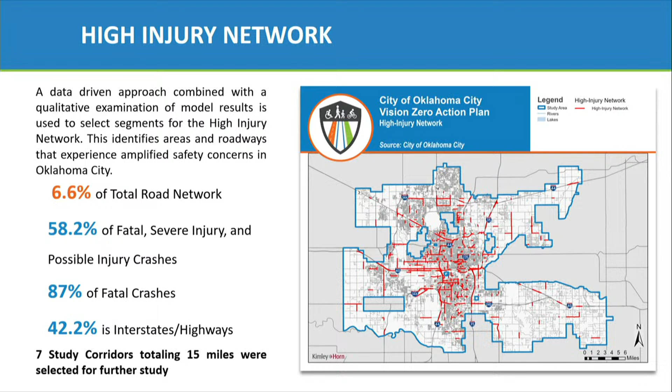We then used the high injury network and selected 7 priority corridors identified for further investigation by our engineering team, to look at and identify recommendations and possible solutions to improve safety along those specific corridors.

Part 3 is focused on designing the solution and getting to zero, which covers the more prescriptive measures of the plan. This includes identifying traffic safety countermeasures that, when implemented along certain roadways, can have a significant impact on reducing serious injury and fatal crashes.

Roundabouts are also a great alternative—lower speeds, fewer conflict points—along with other treatments for pedestrian traffic control devices, like pedestrian hybrid beacons.

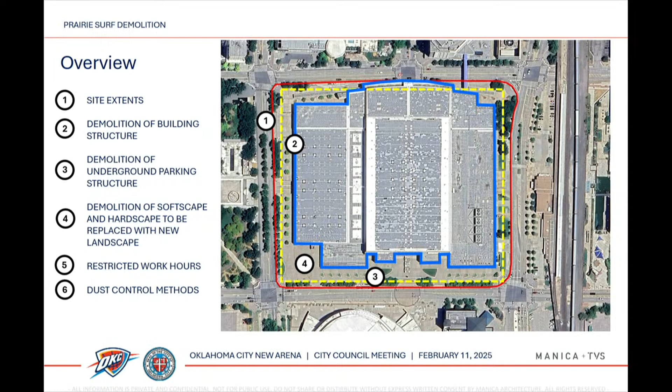Some notable aspects of the project—there is some complexity. We will work with the contractor to keep intact the 2 street car stops on the north and south. There is an underground pedestrian tunnel, item number 2, which will be capped off temporarily for demo construction and then reopened through new construction. There is also an overhead pedestrian bridge linking to the Wyndham, which will be demolished in its entirety, and the gap left in the hotel will be patched to match the existing facade.

Number 4 designates some trees that we are working to preserve. As you'll note, there are a lot of trees over the parking deck—those will obviously need to be removed, but we are trying to save some trees on the northeast corner. There are also some items to be salvaged; we'll work with the contractor to salvage the right-of-way items, and there are some additional architectural elements that will be saved as well.

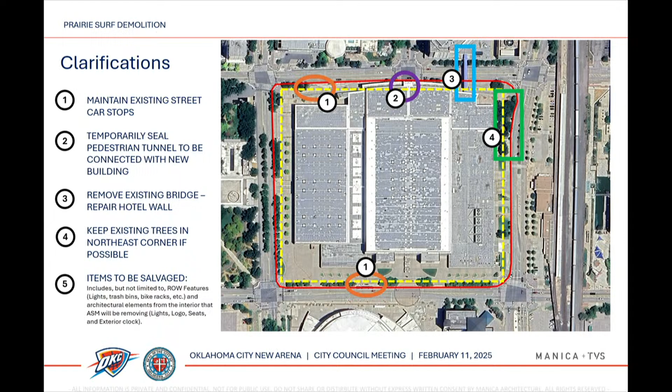Lastly, traffic. We will work with the contractor to minimize any traffic impacts. We have identified, in order to keep it organized, a single construction entrance to the west and a single construction exit to the east. That should minimize any impacts to the overall traffic.

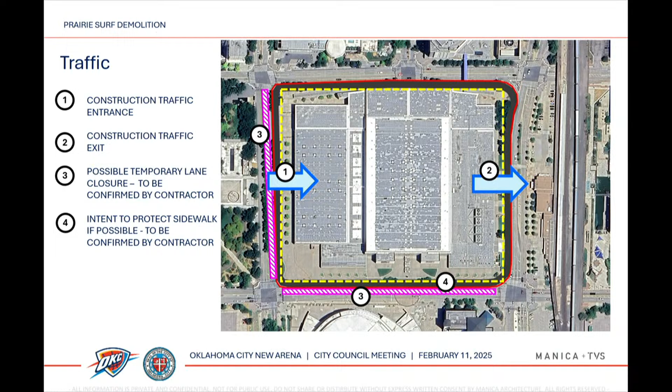As noted, the extent of the parking deck does get quite close to the right-of-way on the west and south ends, so there may or may not need to be some lane closures that are temporary. We again will work with the contractor to minimize that impact, but we don't believe there will be any substantial impacts to the overall traffic.

Schedule, just walk through this real quick. Pre-bid conference is scheduled for February 20th. The demolition bid opening will happen on March 5th. We will then give a recommendation to council on March 25th, and we will give the contractor notice to proceed on the 26th. The entire construction is intended to be 6 months long, so completion at September 30th. And that's the extent of my presentation.

I know there's a lot of traffic around 7 a.m. to 9 a.m. and 4 p.m. to 6 p.m. because I drive it every day. Any special precautions being taken during those time periods?

I was actually meant to mention that we will try to work with the contractor to minimize that disruption in terms of limiting the time duration of construction to limit both noise and dust. So we believe that will also minimize the traffic concerns there as well. And then I also meant to mention that we will try to preserve the right-of-way sidewalks on the perimeter, but again, we'll need to work with the contractor to see what's possible there.

Great, thank you. Does anyone have any questions about the demolition? If not, I'll entertain a motion to approve items A through F.

Thank you. Thank you.

We have a motion and a second. Please vote.

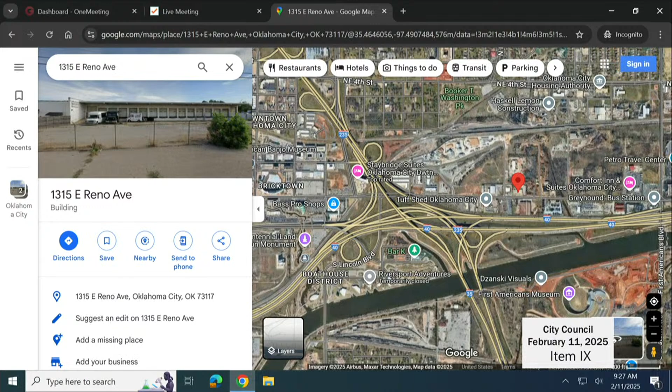So if you flew here from Fort Worth, Fayetteville, wherever, and your hotel is here, you have to rent a car to get over there. You should be able to walk safely to something that close. You should be able to take your dog. There's a place called Bark right there. You should be able to access that.

And so right now, people cannot access the Boathouse District by foot or by bike. They cannot access this corridor safely, and their lives are literally in danger, as you saw from the report in Vision Zero. So I just wanted to give that much bigger context.

I will also note a lot of this used to be middle-class black housing all north up there before we built I-235 right through historic black neighborhoods. I say that during Black History Month. We can do better than what we are doing right now. And I'd like to know, what is our plan for sidewalks or trails or street lights and trees to make this safe access from Bricktown to First Americans?

I'm proud of the things I just said about Bricktown and First Americans, but what are we doing to connect people to it by foot and bike, safely? That's certainly something we can look at and get back with you on. Not anything I have here today, but we can have conversations and provide information.

I think it's interesting to see how we look at that with the Bike Walk plan and what we have there. There's a lot of interesting questions about what we do with that corridor and how we address it.

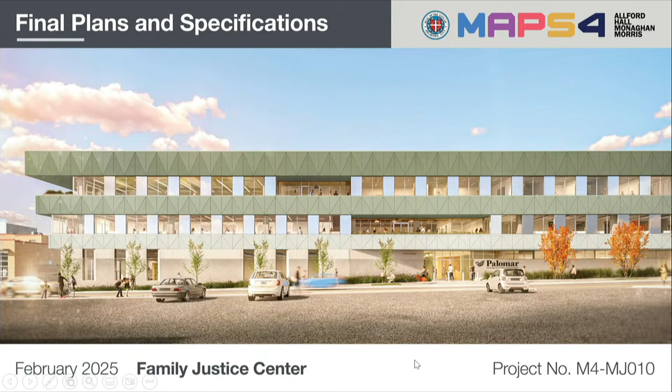Good morning. Thank you very much for having me today. I'm delighted to present to you the final plans and specifications for the Family Justice Center, otherwise known as Palomar. It's been a couple of years since I've been here to present, so we're delighted to finally make it.

This is Midtown. You can see the existing Palomar building there on the corner of Hudson and 11th Street. The proposed site for the new building is directly opposite where the dog park used to be, in that red box shown between 11th Street, Hudson, and Park Place to the south.

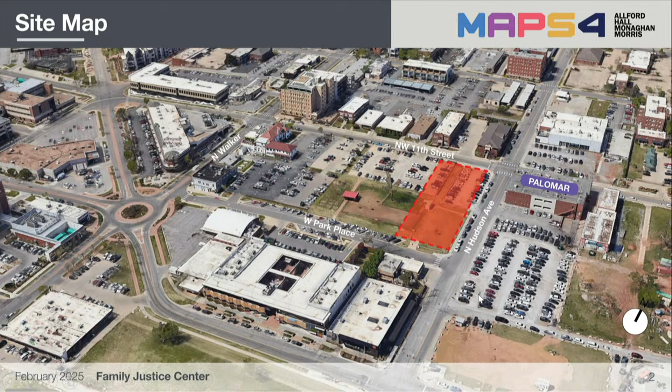On timeline, we're here today to present the final plans. Hopefully, if it goes well, we'll go straight out to bid. Bids will be received back in the beginning of March, and then hopefully we'll be back here again in mid-April to present the final figure for construction, and if approved, we'll move into construction, due to be completed on the 11th of February, 2027.

The building's a 3-story building, just under 72,000 square feet. The first floor is predominantly client spaces, medical services, a cafe space. On the second floor, there are partnering offices and Palomar offices. The third floor is mainly a large community room and therapy rooms.

And then the private spaces where clients spend a lot of their time are tucked away at the back of the building, very protected and concealed, and they all face out towards a courtyard space in the center. One of the things we wanted to do from day one was make sure that every single client space had access to natural light and access to nature, because that really does improve people's well-being and helps the recovery process.

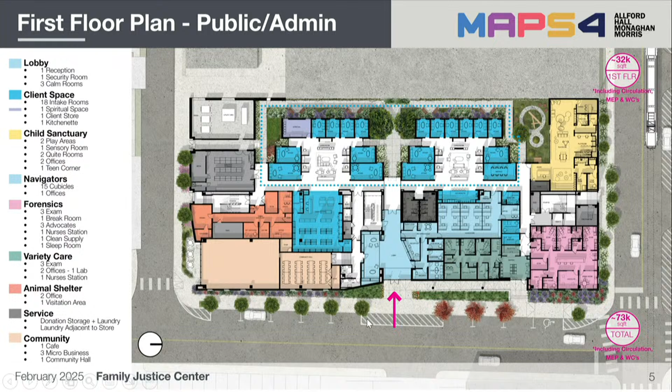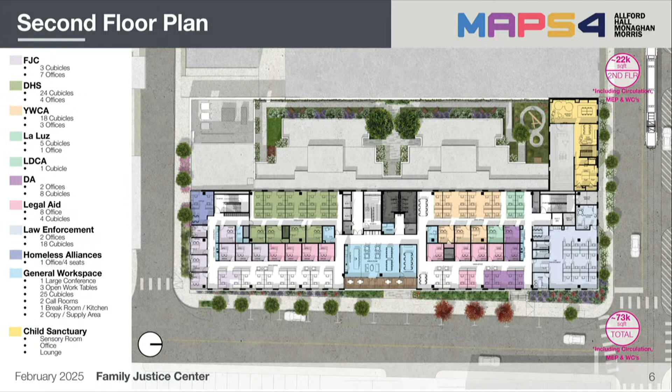Moving up to the second floor, this is, as I mentioned, the office space for all the partners and Palomar's own staff as well. I won't go through all the partners, but you can see them listed there on the left-hand side. The idea of this space is a mixture of open office space and cellular office space, but the idea is that there's a central hub in the middle there with a break room that's hoped to bring people together and help collaboration between those different services.

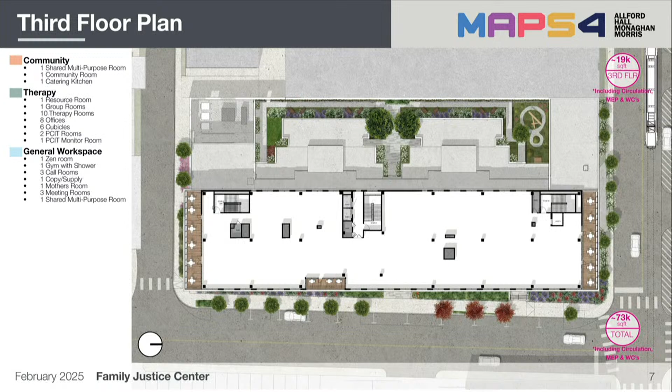Then moving up to the third floor, as you can see right now, this is proposed to be just built out as a white box. I'll come onto that in more detail, but due to budget constraints. This area will have a large community room and the therapy spaces and some general workspace as well.

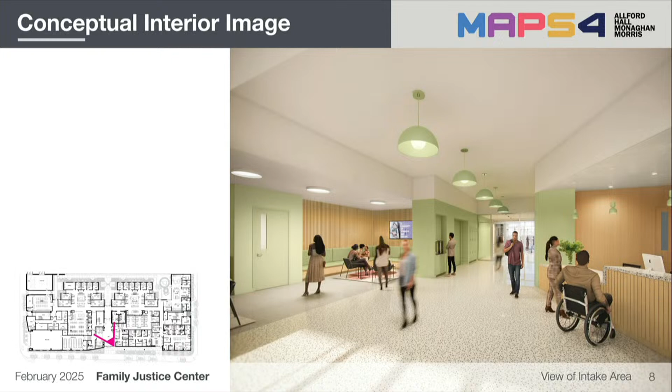And here's some images of what the building will look like. So this is the main lobby space as you come in off the street. The reception's there on your right with a waiting room on the left, and then the secure entry point in the distance there with the glass doors.

These are the living room areas, as I mentioned earlier, and around there, these main sort of hubs are the client intake rooms. The idea is that they are meant to feel like a living room, so they're very domestic in scale and don't feel institutional at all, and provide different spaces for people in different crises.

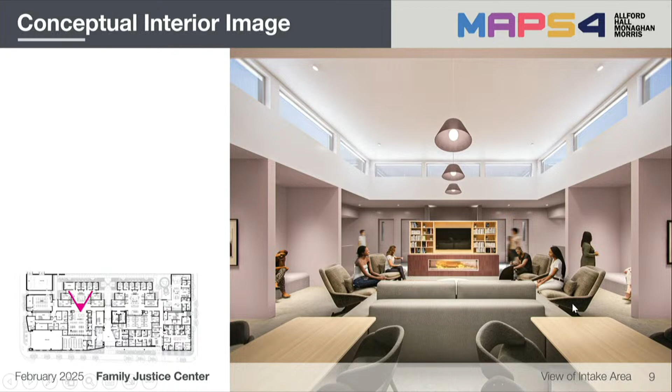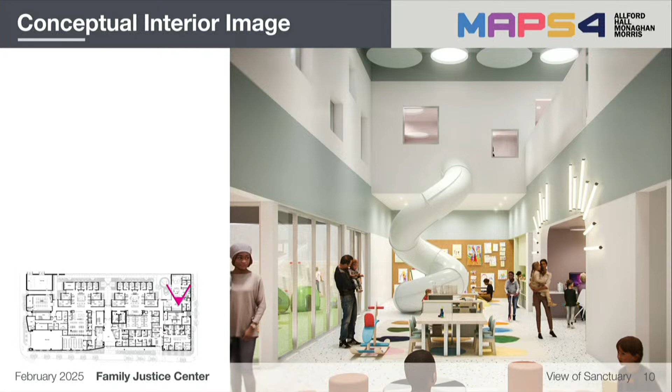This is the kids' play space, so this is a taller, brighter, double-height space, hopefully with a slide in the middle of it that also opens out to an outdoor play area.

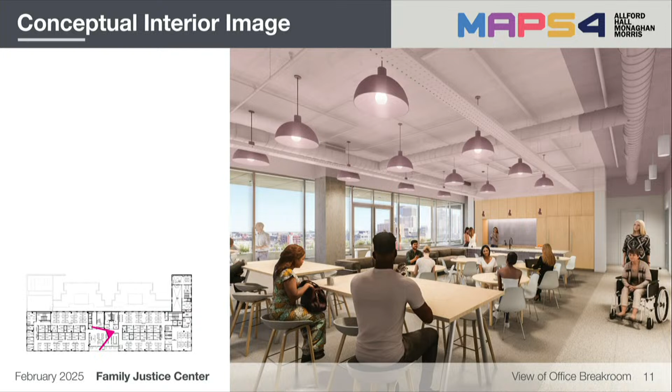This is moving up to the second floor, so this is the break area I was talking about earlier, a collaboration space with a large outdoor terrace with views of the city. And this is what the building will look like from the outside.

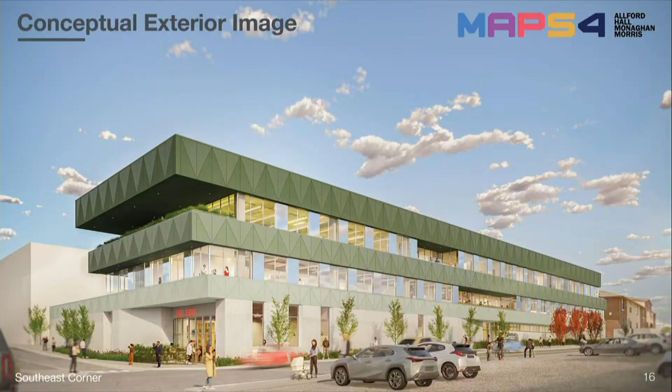And that's what it will look like. That's what it looks like from the corner of the junction of Hudson and 11th Street.

Again, that's another view of the main entry point in the center of the building.

Looking at the cost estimate, the original budget for this building was $26 million. As David mentioned, we're proposing to take $2 million from the endowment trust, which gives a revised project budget of $28 million. When you add up the fees, contingency, and also some site costs we've had to include regarding relocating sewers, COX, and OG&E, the estimate has come in at just under 28 million.

The alternates, which aren't included in that base bid, are listed here to the right, and I'll talk through those in more detail. The main one is the 3rd floor fit out. As you saw, we're proposing that would be a white box space with a cost of about 2.3 million to fit out at a later date.

The cafe on the 1st floor is not included in the base bid. Some security items which we hope will be provided by the police department. Furniture - if we haven't built the space on the 3rd floor, we don't need to provide the furniture for it, so that can come out. The police department furniture they will provide themselves, but we've brought it out as an alternate. The kids' play equipment is also an alternate, and some technical items, mainly TVs for meeting rooms and other technical equipment. The cost of those alternates comes to about 5.4 million.

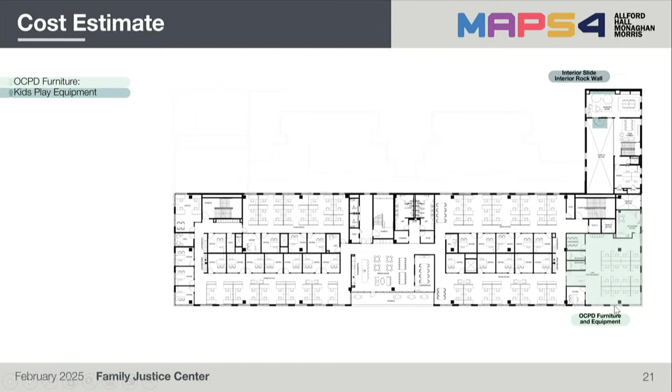That includes the white box of the cafe. The security items I mentioned that the police department will likely provide are a security film across the front, a bulletproof shield across the reception area, and a shield below the reception desk. As an alternate, we have the external play equipment. Moving up to the 2nd floor, the furniture from the police department will be provided by themselves.

And then the 3rd floor, this is obviously the big one. These spaces will not be provided as part of the base bid, but included as an alternate. Hopefully, if all goes well, we can use the contingency money to pay for the fit out of these spaces. And that's the presentation for today.

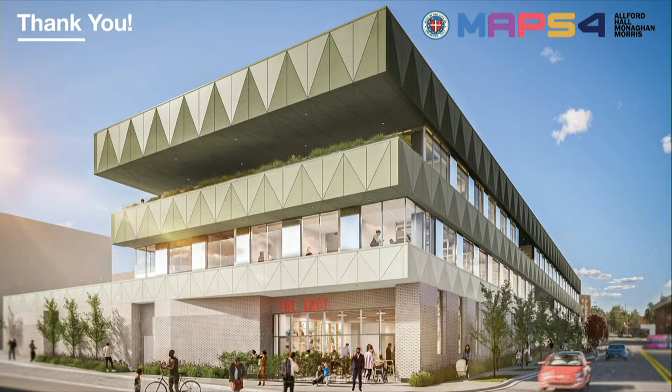Dan, thanks for the presentation. We really look forward to February 11th, 2027, when the construction's complete and the building's open. A lot of people have worked really hard to make this become a reality, and we want to thank you for being a part of that.

Any questions from council? Yeah, I wanted to tell David Todd how much I appreciate him working on this and making sure we came up with a way to work the funding around on this thing to get it done. I've heard of other projects that supposedly tripled in value or cost, and ours haven't tripled, but they are tight.

And this is one project that I personally feel is very important that we get done, and get done in the correct way. So I appreciate all of city staff and everyone working to make sure we can get that done. Me too. Thank you. Any other questions or comments?

Yeah, I have a couple of quick questions. As this facility functions, about how many people are we saying on a daily basis? I'm asking that because my question is really about looking at the actual restroom space. How many stalls are in the plan?

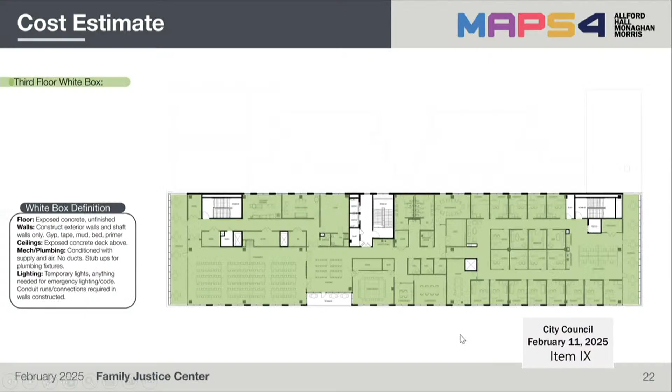I'll go back, if I can, to that plan. I'm not sure I can. Go to the floor below. Oh, yeah. So these are the main restrooms provided for the users of the building. There's also one on this floor and the same area upstairs as well.

So the plumbing piece makes sense, but correct. There's also a number of other restrooms dotted throughout the facility. We have some down here that operate for the lobby space. All of the forensic medical areas have their own restrooms as well. So there's lots of restrooms dotted around. We've worked it out to code, and that's all been approved.

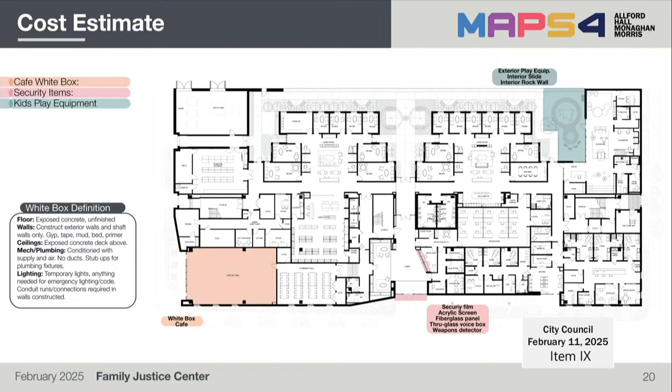I didn't see those identified with the colors, so that's why I was asking the particular question. Sure. Okay, that's all I have. Thank you for your presentation and work.

Would you go back to the thank you slide?

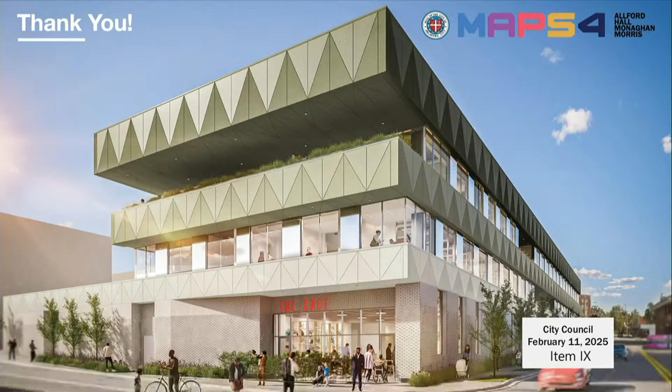I think I'm understanding. I did watch the MAPS 4 Citizens Advisory Board discussion around our funding plan, but I just want to clarify, if I'm understanding at least presently, this image right here with this cafe, that's not happening, correct? Like, that is part of an alternative. What is our plan here? Because first of all, it's hard to offer a critique when one is the child of domestic violence, right? When this is, to Councilman Stone's observations, one of the most, if not the most important project in MAPS 4. I wish more of this had been there when my family experienced what we did. Let me just preface that. But then secondly, it's actually physically hard to talk on this topic.

At the same time, my understanding is the services we're providing within this building, while very important, the design too is very important. So this cafe build out here, if I'm understanding correctly, currently we are not planning to build that? Can you walk us through that? Because that seems missing right now in terms of funding, and I'd like to better understand that alternative funding and what Director Todd is describing to us as our plan to actually make this rendering a reality.

Sure. So the base bid that we are going out on comes in just under budget of the 28 million that I spoke earlier. So it would include the space for the cafe. The base bid would include the space, so it includes the windows and no internal walls, no kitchen fit out. Not a functional space for a cafe, but it includes the area, so it can be fitted out at a later date. And the same with the third floor, which is the community room.

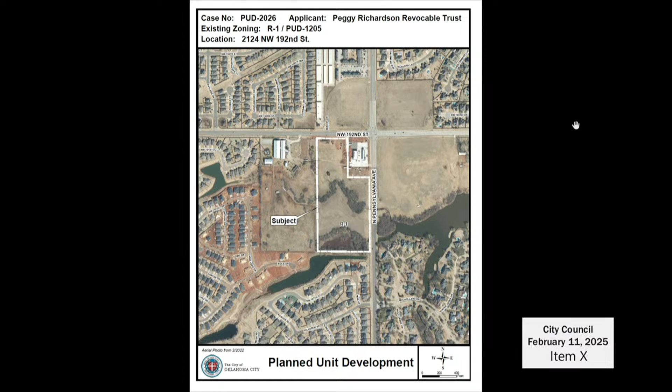Good morning. David Box, 525 Northwest 11th Street. So this is a PUD that Mr. Work and my office spent a lot of time negotiating, and we're happy to report that as of Friday, late afternoon, we've come to a resolution that will allow us to move forward with the majority of the protests going away, and the folks most impacted have specifically withdrawn their protests.

So I do need to note for your agenda that we need to strike Amendment 1, and I'm going to read an amendment that needs to replace that, which represents the PUD revisions that both Mr. Work has signed off on and have been transmitted to staff.

So the revisions are an amendment to the master design statement modifying section 8.1 to prohibit administrative amendments, section 9.0 to prohibit administrative amendment, section 9.2 regarding landscaping regulations, section 9.3 regarding lighting regulations, adding section 9.3.1 regarding exterior lighting standards, section 9.8 regarding access regulations, section 9.13 regarding height regulations, section 9.17 regarding specific plan requirements, building orientation, and balconies, and section 11 to revise Exhibit B and add Exhibit D, tree varieties.

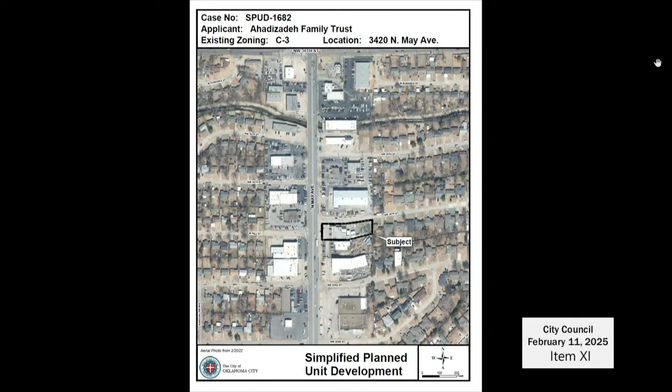I bring this up because I know neighbors who have reached out to me concerned about May Avenue generally when it comes to medical marijuana, so I want to make sure there was some due diligence here. So two weeks, sir—are you fine with 2/25/25? That'd be great, thank you. Are you okay with that? Sure. All right, thank you. I appreciate your understanding. I'll entertain a motion for a deferral of this item till February 25th, 2025.

It passes. Now, Craig, I can't read my handwriting—is E still on? Yes. Okay, we're now at item 11E, which is in Ward 4.

Thank you, Vice Mayor. Has anyone signed up to speak? All right, this is just a small commercial expansion on 5 acres out at 59th and Luther, next to an existing area. So with that, I'll go ahead and move for its approval.

Great, we have a motion and a second. Please vote. It passes.

We're now on page 13 of the agenda, item 11F, which is an ordinance on final hearing, rezoning 4608 Northwestern Avenue to SPUD 1691. Ward 2? Mr. Box, is this you? If you wouldn't mind telling us a little bit about this—I missed you last night, I was teaching till late, but I appreciated your text outreach. I teach till 7:15 on Monday and Wednesday evenings.

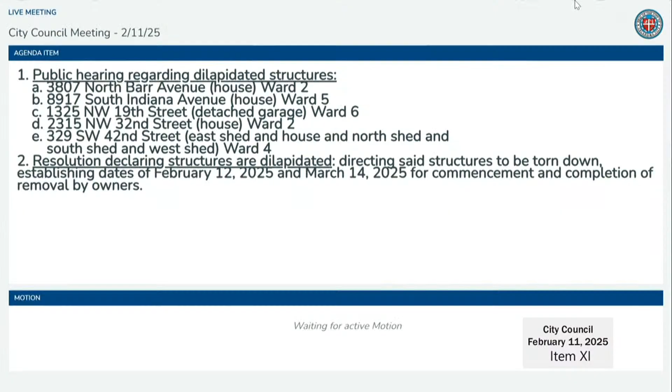We now find ourselves at page 14 of the agenda. Item 11N was struck? Okay, so we will move on to item 11O, which is a public hearing regarding dilapidated structures, as listed here at A through E. No one signed up to speak. We will move to item 11O2, which is the resolution declaring the structures are dilapidated. We have a motion and a second. Please vote.

It passes. We'll now move to 11P, which is a public hearing regarding unsecured structures. No one signed up. We will move to item 11P2, which is a resolution declaring the structures are unsecured. We have a motion and a second. Please vote.

It passes. We now find ourselves at page 15, 11Q, which is a public hearing regarding abandoned buildings. No one has signed up, so we'll move to 11Q2, which is the resolution declaring the buildings are abandoned. We have a motion and a second. Please vote.

It passes. We're now at item 11R, which is a public hearing regarding a resolution authorizing acceptance of the joint award for the 2024 Edward Byrne Memorial Justice Assistance Grant in the amount of $433,695. This item is like a typical grant that normally would be on the consent docket, but requires a public hearing. This is a grant we've received since 2005, shared between Oklahoma City, the cities of Edmond, Del City, Midwest City, and Oklahoma County, all getting a portion to use for supporting public safety and police purposes. For this year's grant, the city will use it to continue the crime analyst program, funding 4 crime analyst positions. We just wanted to share that information. If you have any other questions, we can answer those, but just so we could have the information for the public hearing. Has anyone signed up to speak at the public hearing?

Turn your attention to the screen. Just in case you ever wondered what $1 billion looked like. We got the opportunity to tour the Atoka pipeline site last week. I just wanted you to see what was going on. This is pretty impressive.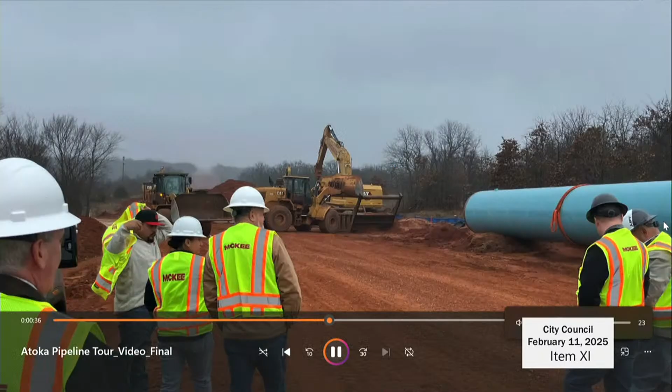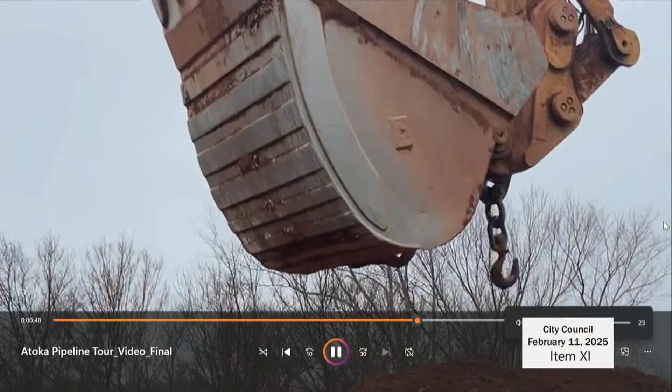I wish. We don't need to add any more cost to this project.

So big thanks to, excuse me, Chris for putting this together, and Andrew for driving us around, and Josh for keeping us all company, but big thanks to Byron for giving us some of his homemade honey. The project manager down there, it was a lot of fun.

Imagine 10,000 pieces of pipe, 50 foot long, individually coming up from Houston, one pipe per truck. By the time this is all said and done, they're burying about 600 feet a day, and they'll have 112 to 125 miles to go from here to there. It's fascinating to watch the ballet that is these $500,000 machines dancing with each other.

It's a logistical nightmare, because imagine all the gravel and all the dirt and all the stuff you have to have at each individual mile set up so you're not waiting on it to get there. So it's really not about burying the pipe, it's about getting all the materials on site. Anyway, thanks for the tour.